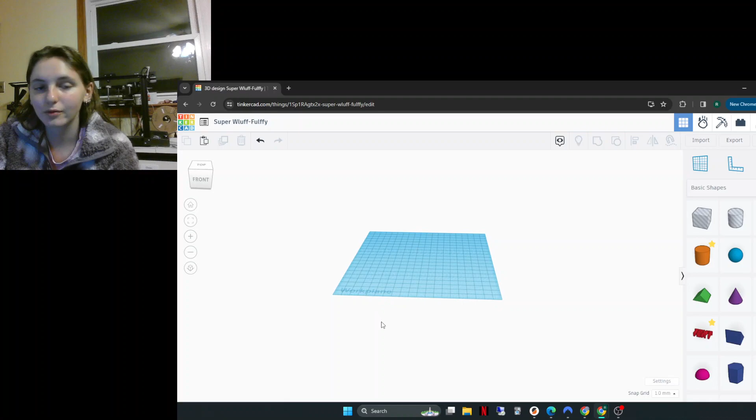Hi everyone, so today we're going to make a simple robot that we will then be able to add on to. So first let's start with the legs.

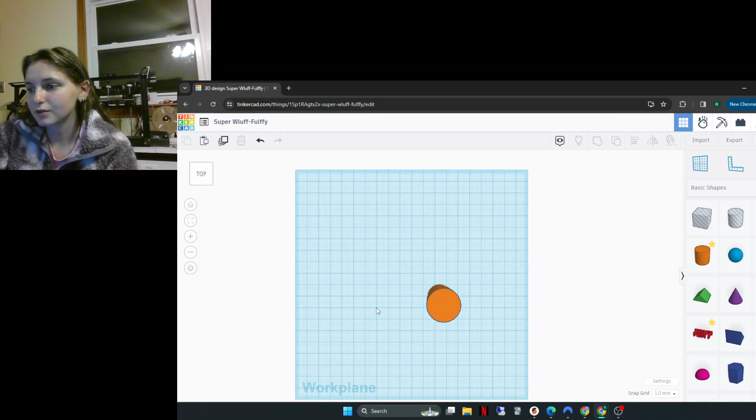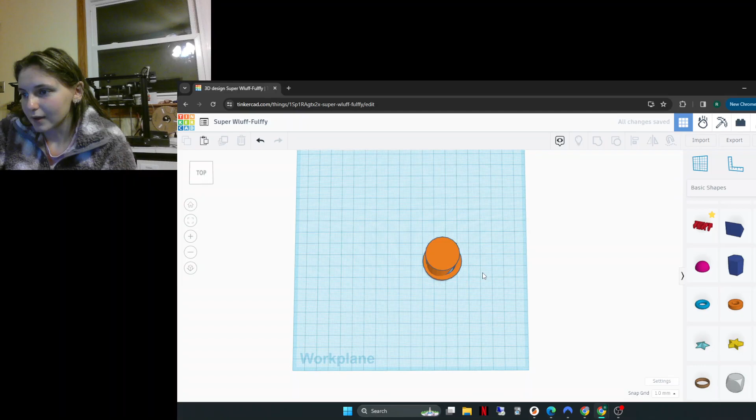We'll take a cylinder. I'm going to make mine taller, and you can make it as tall as you want. Next I'm going to go to the top view and click the tube and scale it up a bit, and get that somewhat aligned. I'm also going to go to the wall thickness and make it pretty thick. So then it is there.

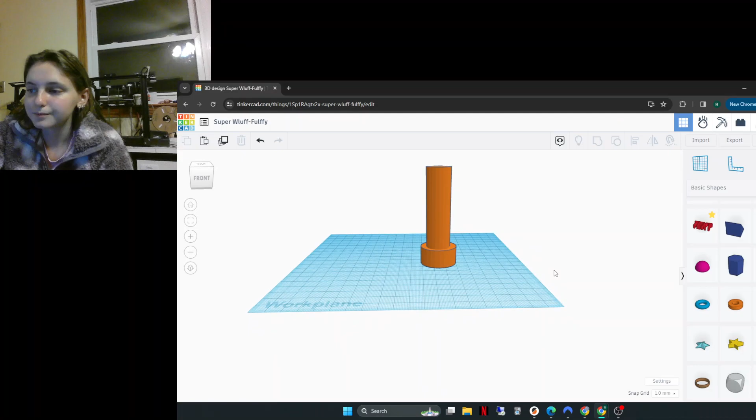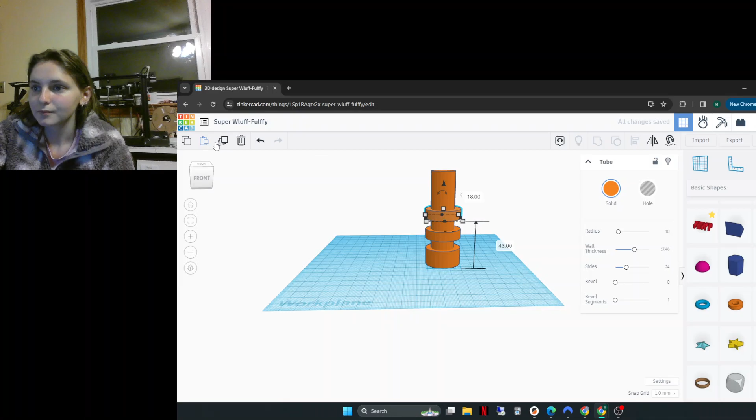That'll be like the base of the foot. This part is optional, but you can take this same cylinder and duplicate it, then just bring it up and shorten it down a little bit to create little segments that can add character to the robot. I do suggest having one at the top so that it connects into the body.

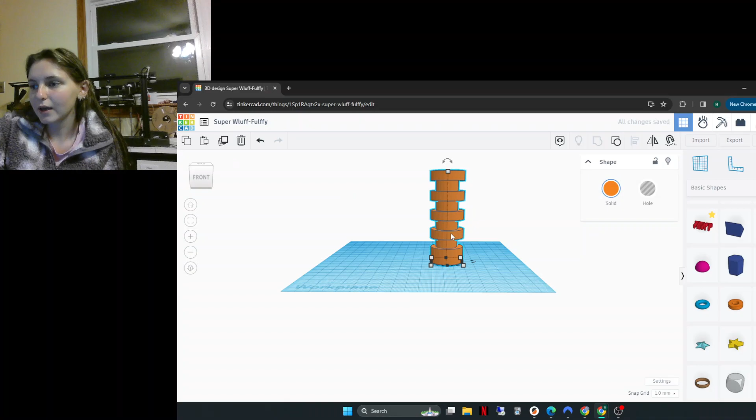So then what I'm going to do is select all of this. We're going to hit group, then hit duplicate, drag it over, and there's the two legs.

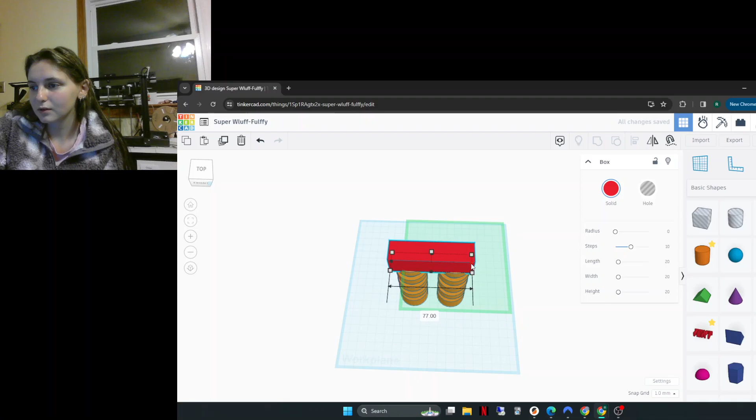Next, I'm going to grab a cube, put it on top of the leg, and drag it out. There are multiple ways you can do this. I'm just dragging it out from the black squares, and just like the legs, you can make it as tall or as short as you'd like.

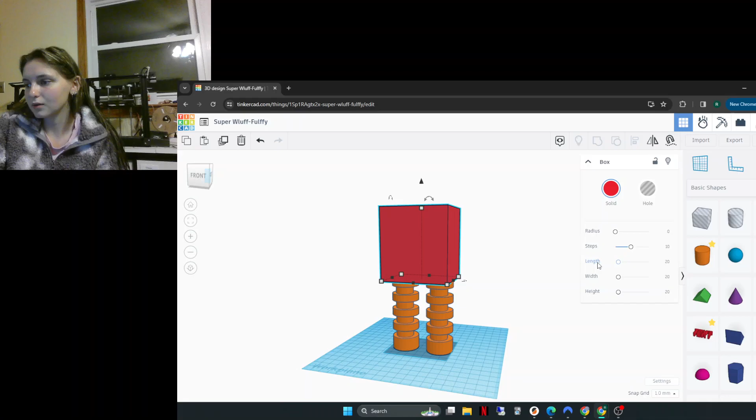Next, what we're going to do is take another cube and work on the body. So I'm going to add another cube here, and for this I'm going to click this corner, Shift S, and that'll help you scale it.

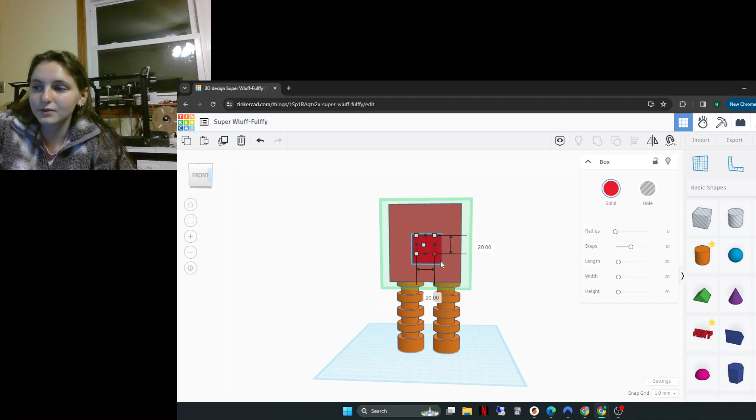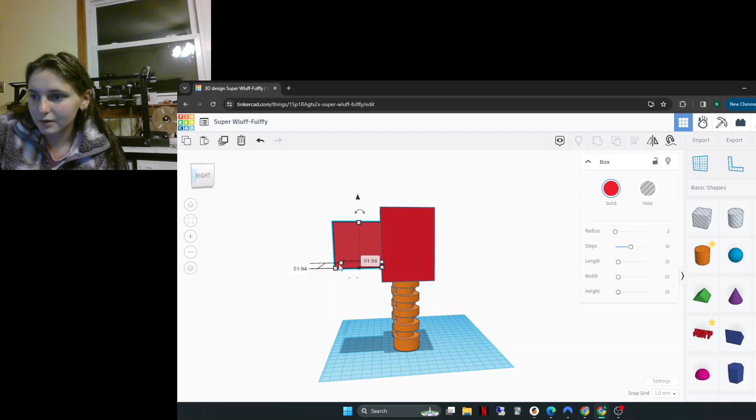As you can see, it's sticking out a lot, so I'm going to drag it from this black square in, and that creates part of the stomach. I'm going to recenter. Whoops. Alright.

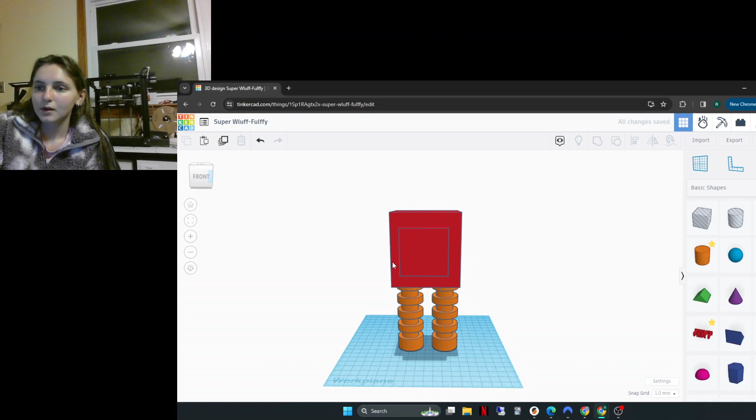Next, we are going to go ahead and take another cylinder and add it on, and this is for the arms. So if you want, for the arms you can also just take the leg. If you don't, you can just take another cylinder and raise it up. I'm going to take the leg.

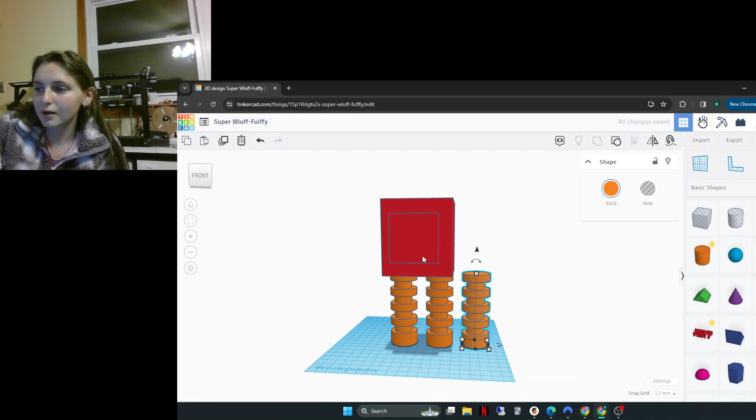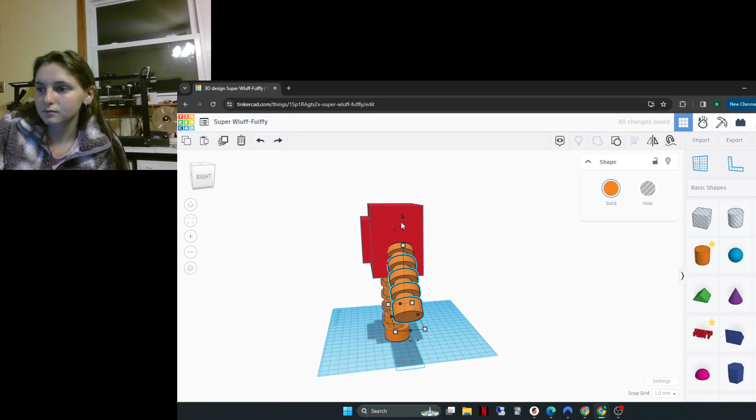So I'm going to go to the leg and duplicate, drag it out, then bring it up a little bit, and rotate it. Then I'm just going to play around with positioning. Oops. So I'm going to have mine right there.

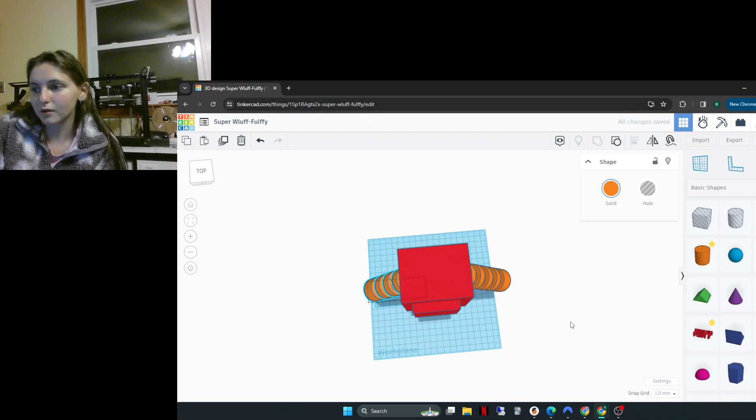And then I'm going to duplicate and hit mirror. We're going to mirror it this way, and then just drag it on over. And then there you have the body along with the arms. At this point, I'll leave that how it is.

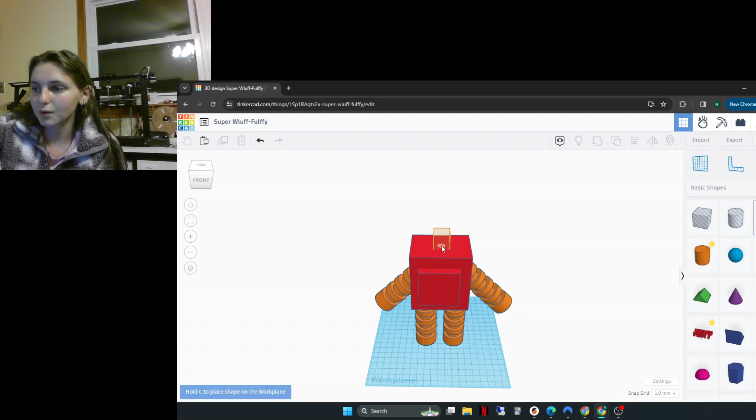Next, we're going to take a cube. We're going to put the cube just in the center there. Then I'm going to take another cube and put it on top of this cube. This cube will be the head. So I'm going to Shift S and scale it up. You can scale it as large as you'd like.

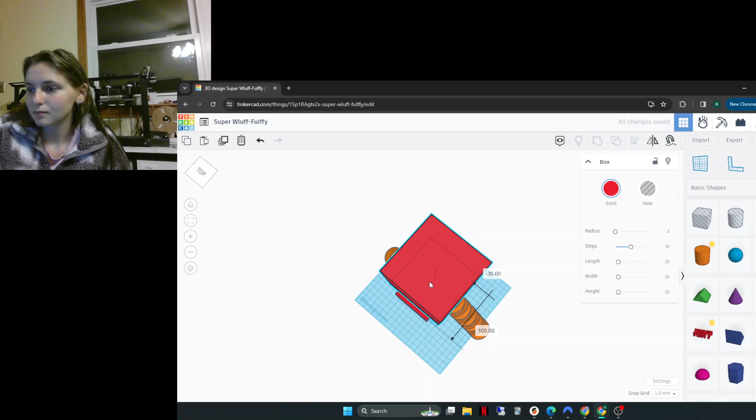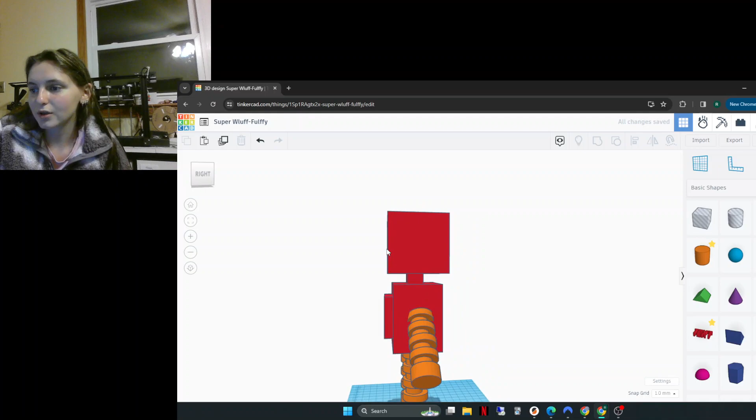Having some problems with my mouse. I'll put that about there. Oops, come on buddy. Then I'm going to just push this down a little bit so that the neck isn't as long, which is totally up to you. You can have it be whatever dimensions you'd like. But here is the standard base for our robot.

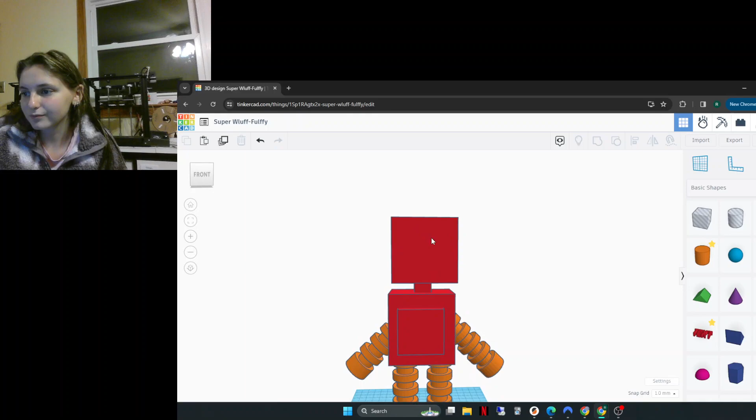Then we can get to the fun part of adding different elements, so like we can add the face. For the face, I'm going to use cubes. So I'm going to bring this down, push it into there, and make it a little bit longer.

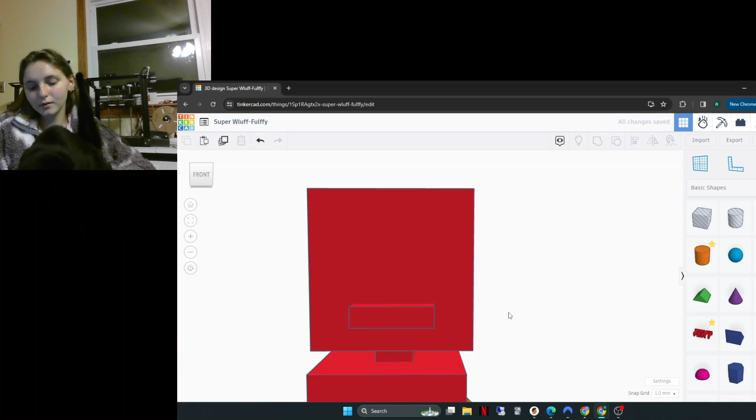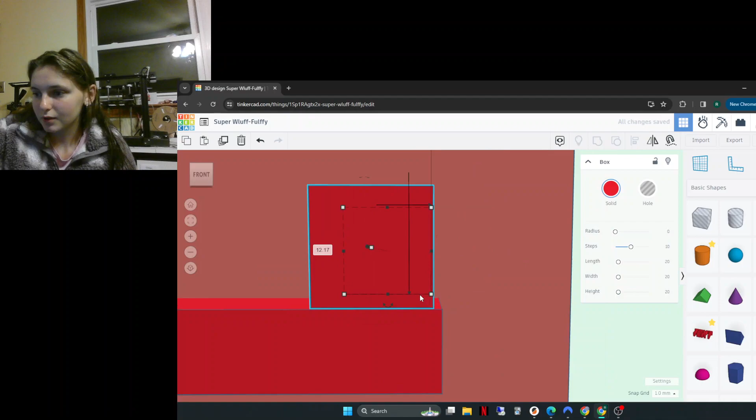I'm going to grab another cube and put it here, and I'm going to scale that down. Whoops, gonna try and get these edges to line up a little bit. Like that. And then I'm going to duplicate and drag over.

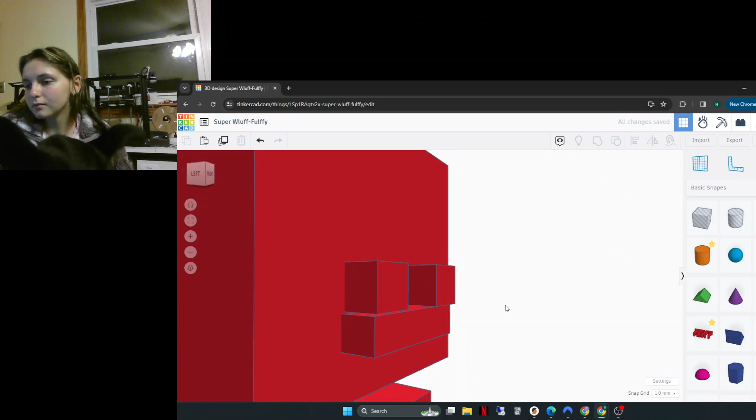Like that, to make the face. I'm going to bring these in just a little bit.

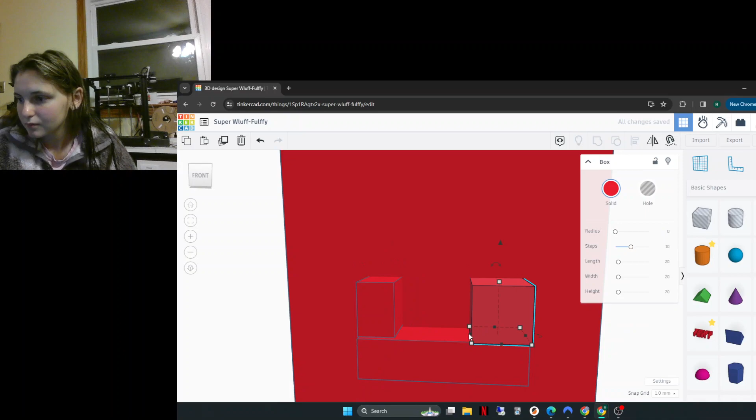I'm actually going to use these same ones for the eyes as well. But for the eyes, you can use whatever shapes you want.

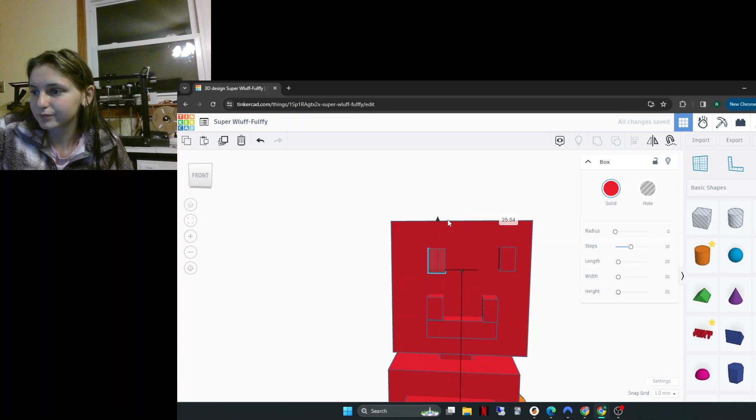For example, you could do star eyes, or heart eyes, whatever you feel up for. And then you can decorate your robot, add more detail to it. One thing we can do is add parts onto the side.

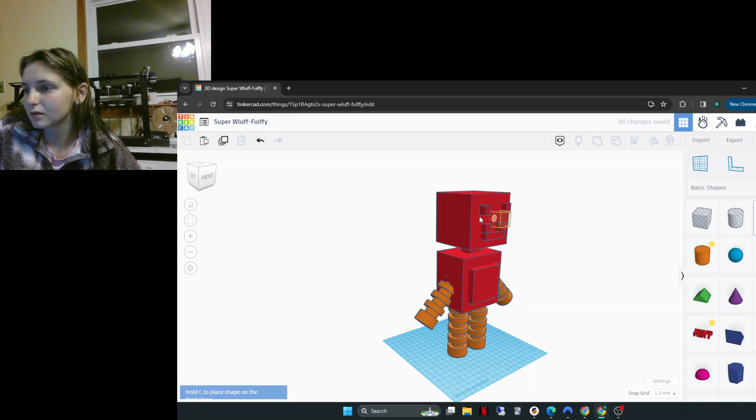Like that. So we can definitely do different things, and there are tons of other things that we can import into this.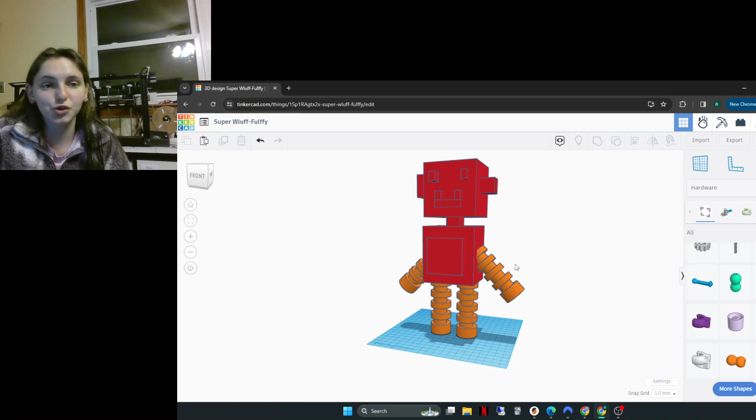So another thing that we can play around with, that I'll go over some more in class, are joints and how to make things move.

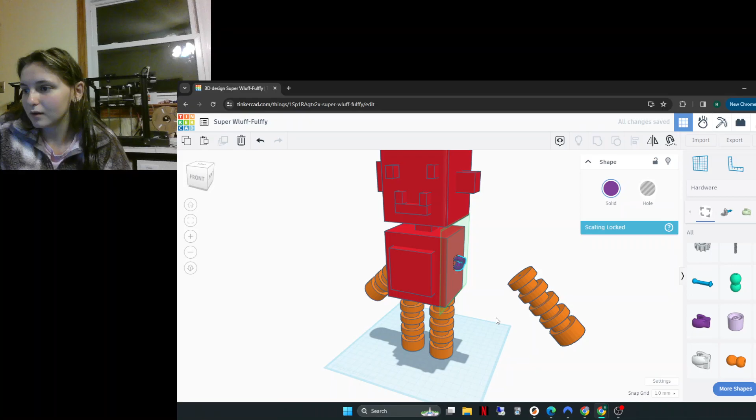For example, we can take this arm and just pull it over to the side for right now. And we can go to the hardware drop down, then go to the purple socket and place this here.

And then I'm going to rotate it like that, and then I have to rotate it one more time. So we'll put that there.

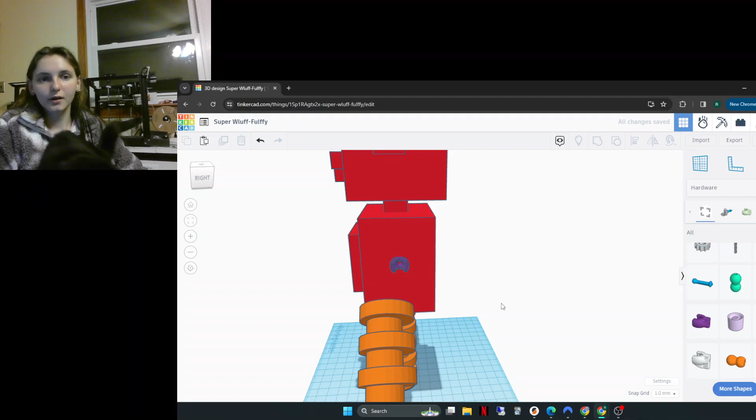I'm sorry guys, this is just not a battle I'm gonna win. But next we can go over to socket ball, that's the joint.

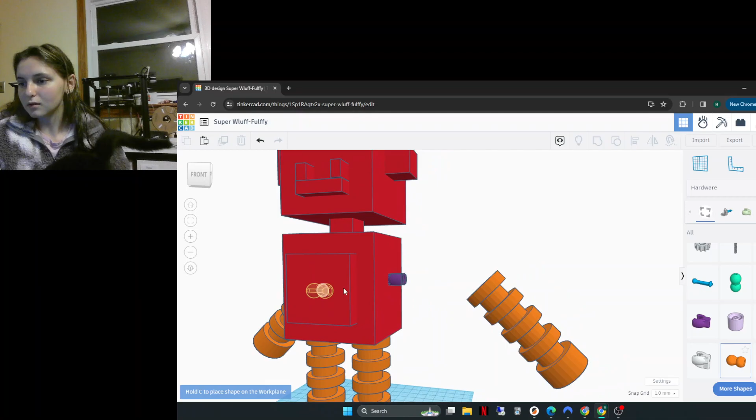So we can put that right into there. You may have to rotate it a little bit, but we can just put that right into the purple joint.

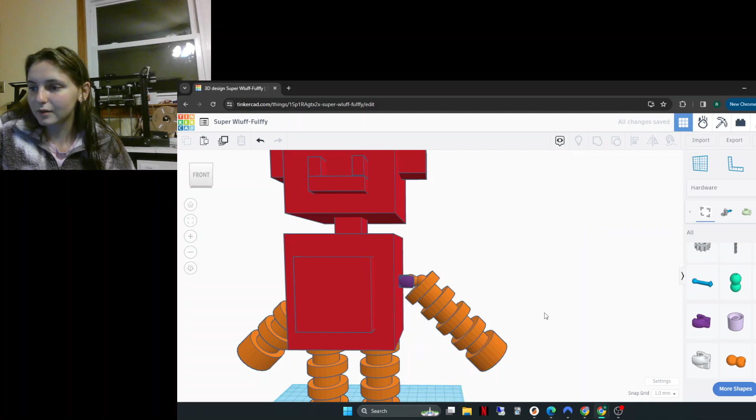And then what we can do is we can just go ahead, add the arm to there. Rotate this horizontally.

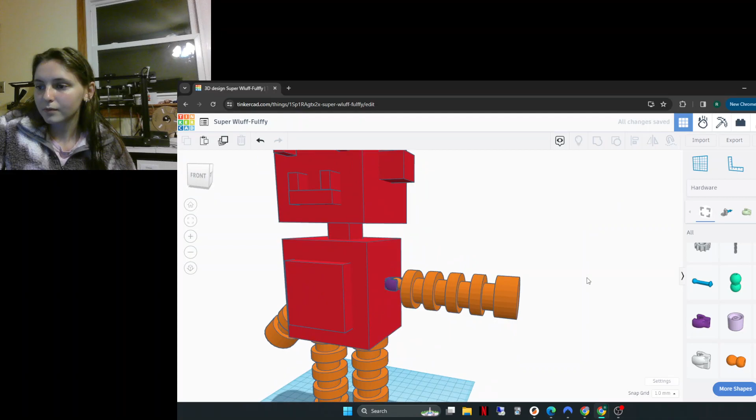And just like that. And then this would allow you to make a posable figure. So if you were to 3D print or manufacture this, you would be able to then have movable joints, so the arm would be able to go up and down or rotate around.

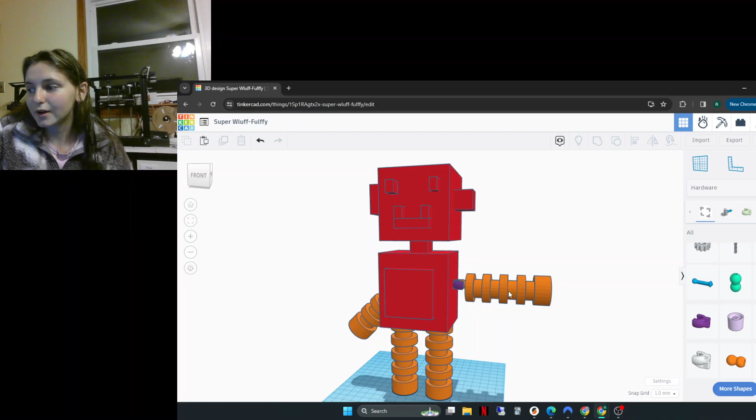So that's a very fun thing that we can add onto it, and we can go ahead and add it on to the rest of our joints. So I'm just going to pull this out.

I'm going to zoom in. I'm going to select those two. It won't let me duplicate. Okay, so we'll just go ahead.

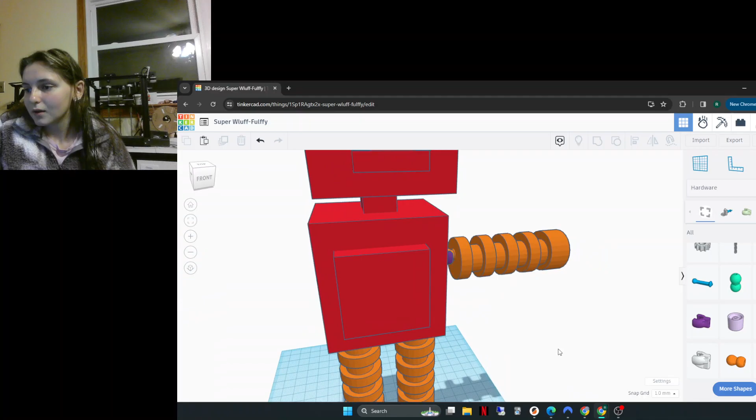We'll select this. Put it there. And then rotate it around. Buddy, work with me.

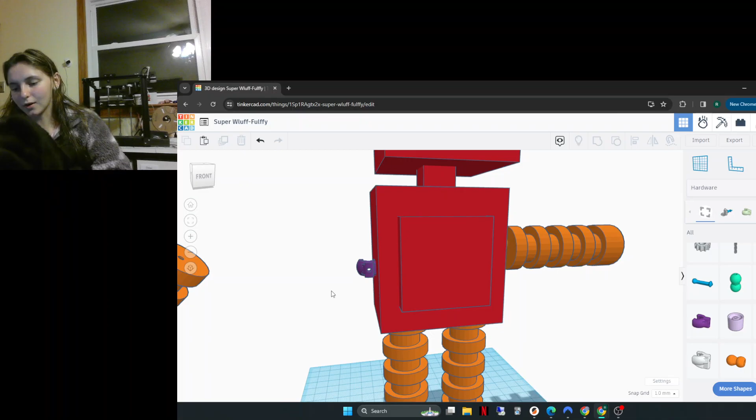Okay. So now that we have this, we're going to try and align it a little bit.

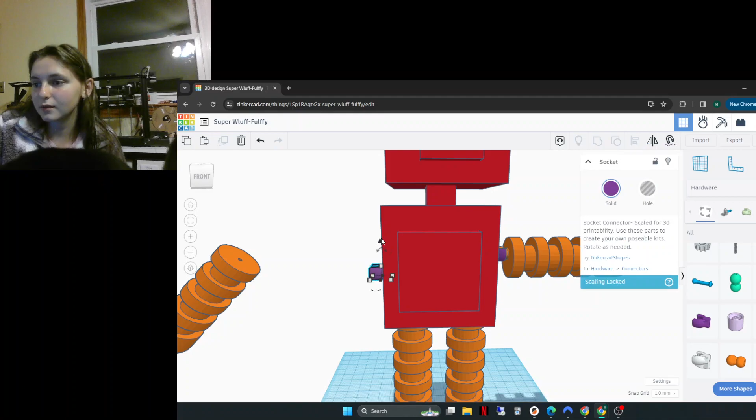And then we're going to do the same thing with this ball joint. I'm going to put it on the inside in there. And you may have to rotate it, it might not go in perfectly the first time.

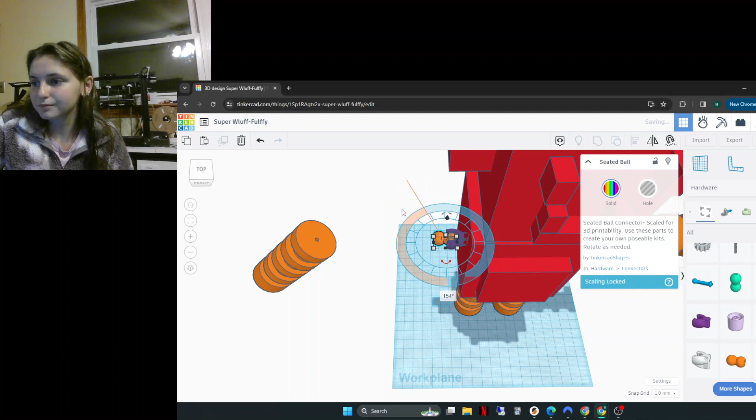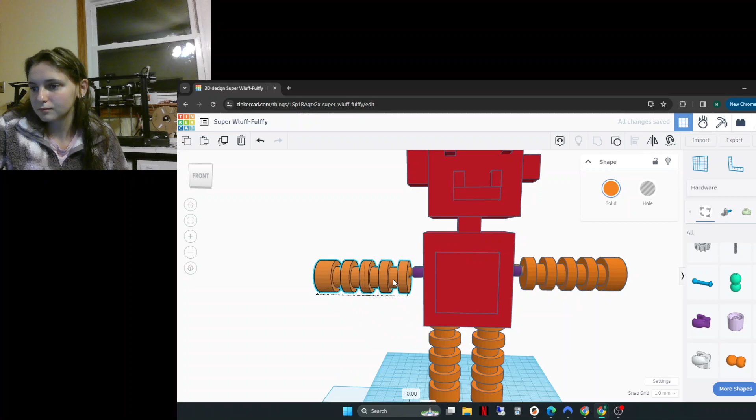So once we get that in, we'll take this piece and we'll rotate and then drag up. And then you have both arms will be posable.

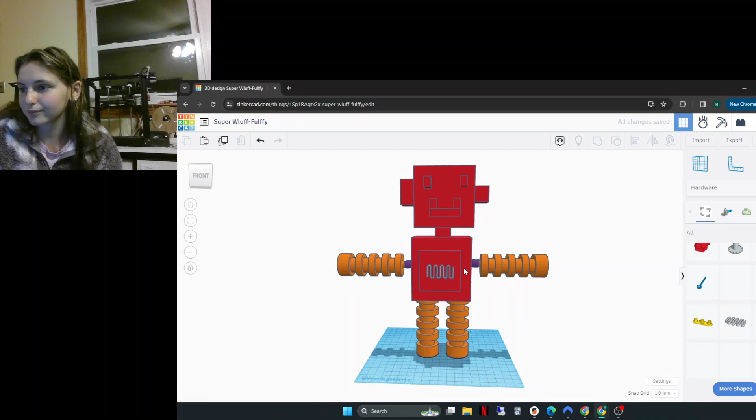It looks like there, if you hit more shapes, there are tons of other shapes that we can play with. So like you could add this kind of wire shape to there.

Along with some other ball socket joints. The nice thing about ball socket joints is that if you have like this is the cup, it's kind of just like how your real joints work, so it allows you to rotate around and kind of move in different directions. That's one reason why I really like using them.

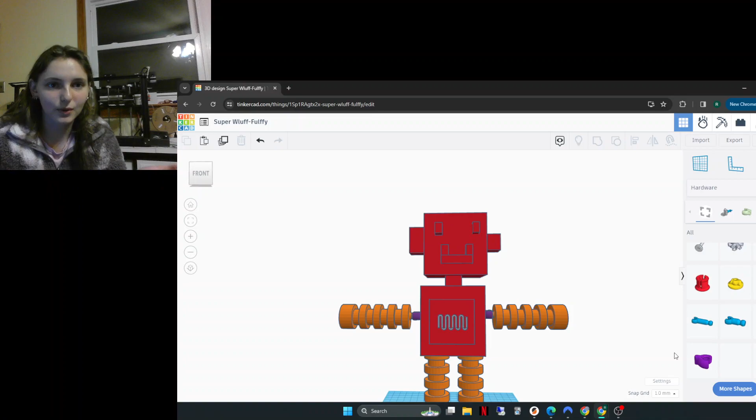And feel free to go through these different drop downs and customize your robot, add different things to it. You could add your initials.

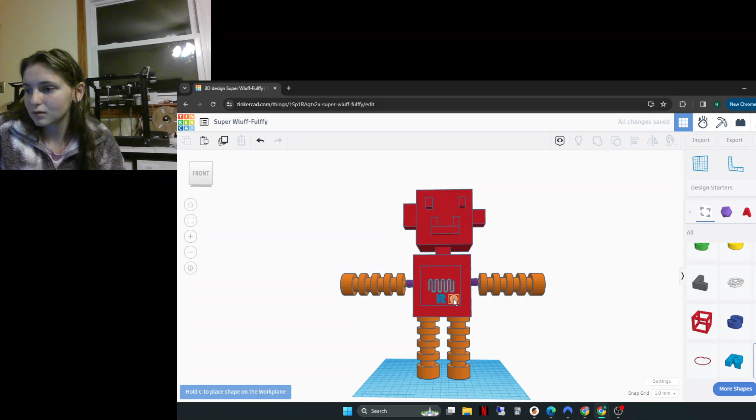There are tons of fun and different things we can do, and I really look forward to seeing everyone and the robot. So that is all for today. Thank you.